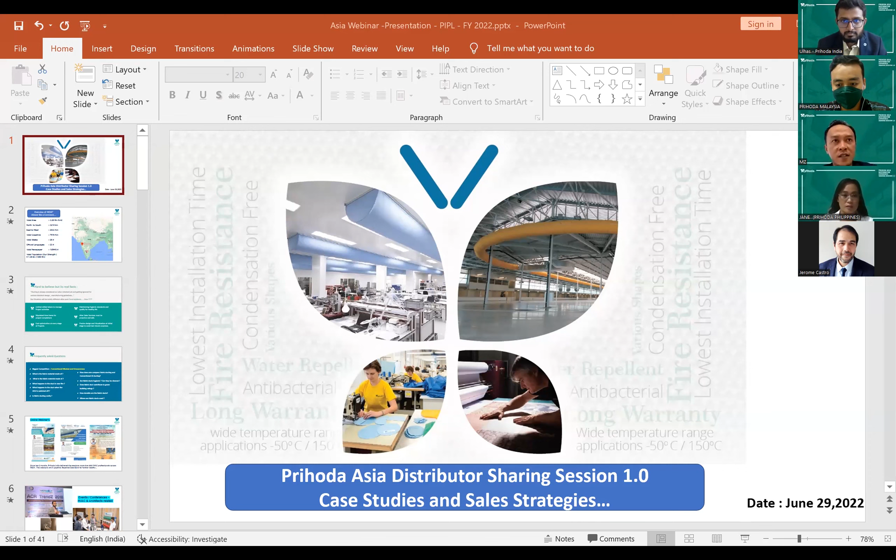Let me share my screen. I hope it is visible to everyone. Yeah, you can see clearly. And am I audible properly, so that I can modulate my voice accordingly? Yeah, your voice is okay, but you want to have a full screen. This one we just see a window. Oh, it is full screen only. I can see the file. Just hold on. Let me have a full screen one more time. Now, yeah, now it's okay. Very good, perfect. Great.

So without any waste of time, I'm just going to start the interactive session. During this interactive session, we'd like to present certain projects and our strategies during the COVID time.

Sorry to interrupt, Ulhas. You are showing us the presenter view. You should try to show us the actual presentation. Okay, click on the three dots below, next to the PowerPoint slide. Go down, go down. There are the three dots in a circle. Yeah. And then click there, hide presenter view.

Okay. That's brilliant. Okay, thank you very much, gentlemen. Thank you very much. But you, back to your screen. So, okay. Yeah, now it's better. That's better. Thank you very much. Thanks. It's a good learning now at the start of the interactive sessions.

Thank you, Jane. So today we are going to cover a few case studies of what we executed in India and a few of the strategies during the COVID time which helped us to maintain our business and customer relationships in this very tough time. If anybody has any questions, they can put them in the chat box or raise their hand, or at the end of the session we are going to have a question and answer session. So with your due permission, we are starting with our presentation.

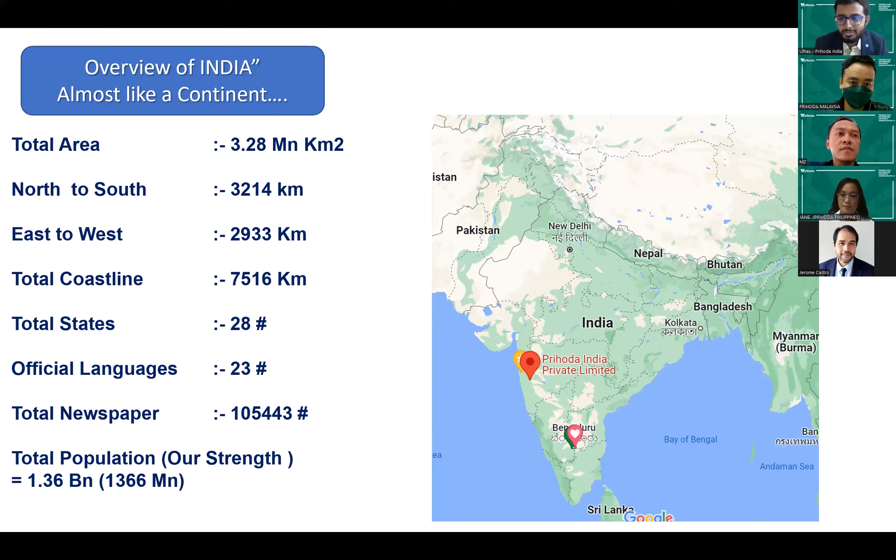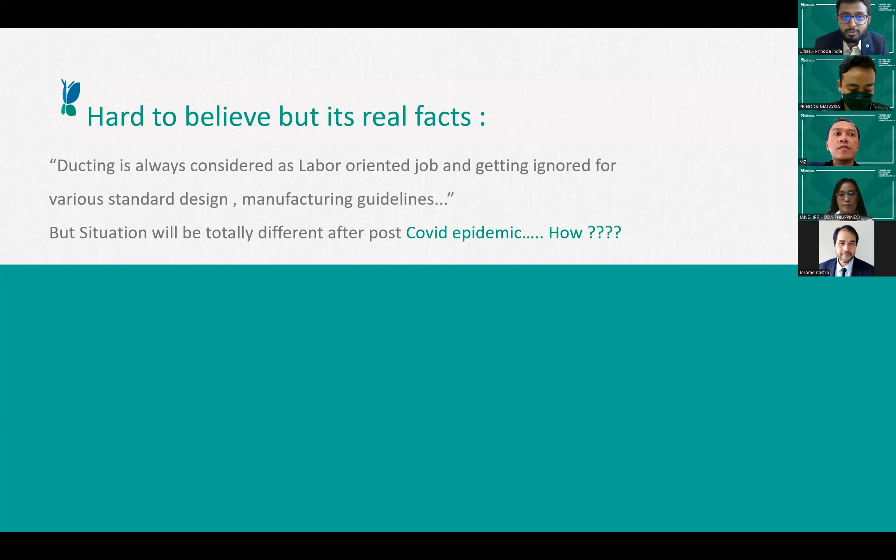And yes, it is very hard to believe, but it's a real fact that ducting is always considered a labor-oriented job. But post-COVID, things are going to change because we have to execute everything with limited skilled labor, maintaining hygienic standards in a stipulated time frame. After-sales services have to be very prompt, proactive and safe. Cost optimization at every stage is going to play a very important role.

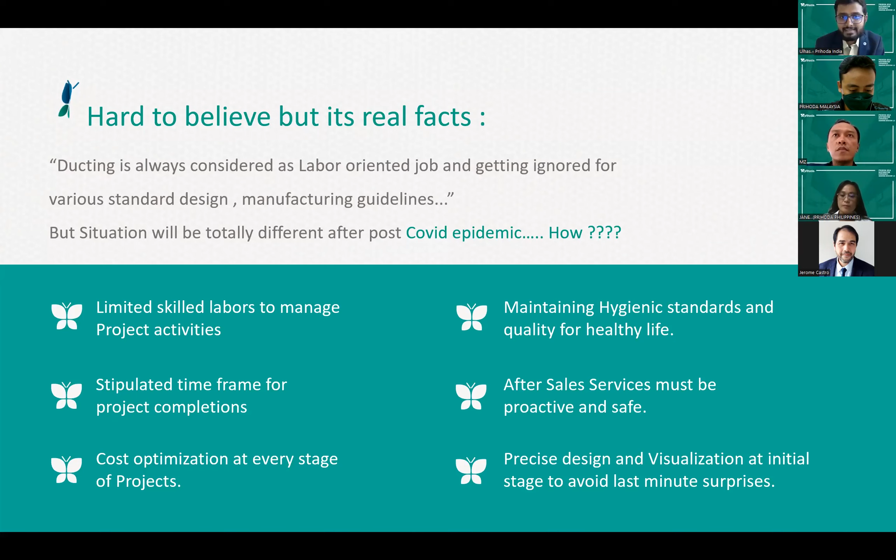So ducting is going to make a very huge impact in terms of cost optimization, in a very fast manner, with precise design and visualization before giving the order. And yes, it is possible in the Prihoda textile ducting business sector. So what are the most frequently asked questions everywhere? I believe it is the same in your countries too, in Malaysia and the Philippines.

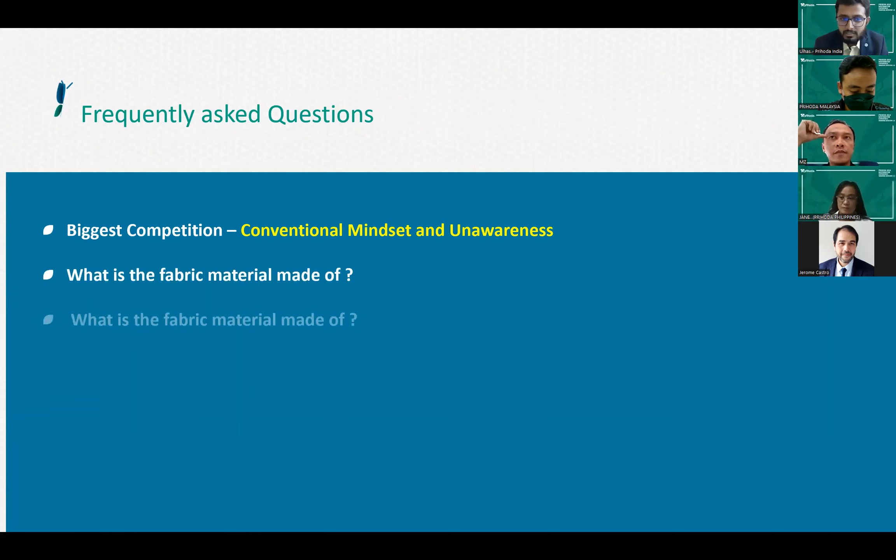Who are your biggest competitors? The first answer we normally give is the conventional mindset and unawareness. So our job is creating that awareness in the market with our various activities. All these questions, like what is the fabric material, what is it made of, what about fire, if the AHUs get switched off and there is no air what will happen, how does it compare with conventional ducting systems.

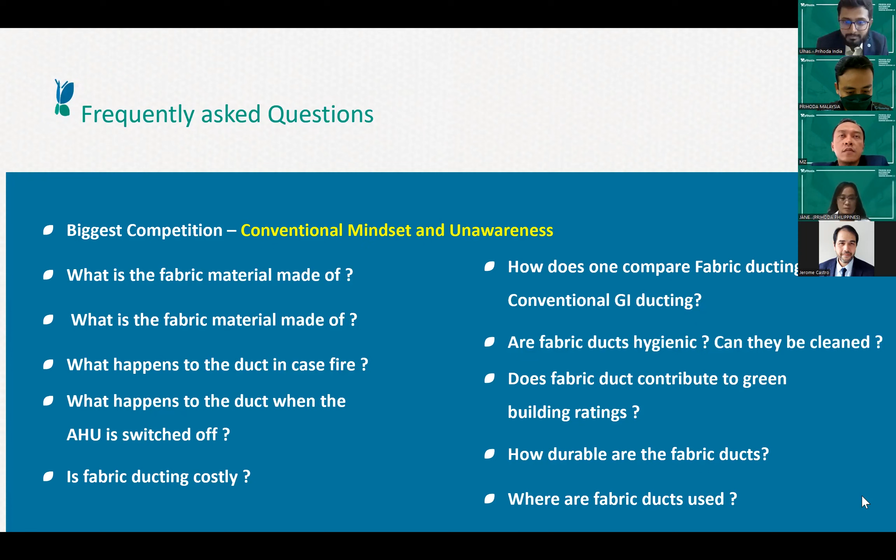Is it hygienic, antibacterial, antimicrobial? How does it contribute to green building? And of course, how is the durability? And which applications can we use fabric ducting for? If you see, from all angles, all our partners, distributors and companies have the answers to all these questions. And trust me, you will get a 100% response from our team for these kinds of answers.

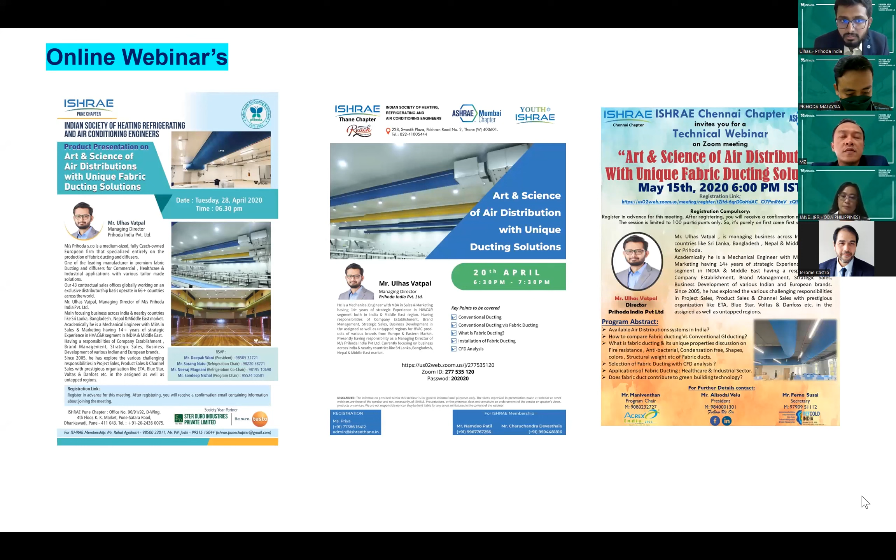During the COVID time, we did lots of online webinars on various platforms. In the last 2 months, we have approached more than 900 HVAC professionals in India, and various dignitaries from the HVAC fraternity attended these events. We also did certain programs during this lockdown, but with limited people, following all the standards. Plus, we are actively participating on social media during this lockdown to showcase our technology on various platforms.

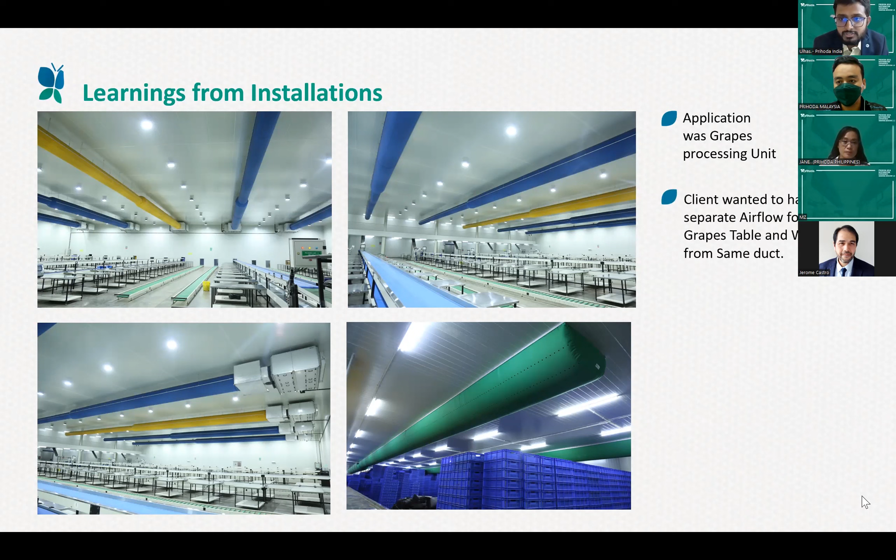The first project in India was in a packing house, which we started in 2019, and trust me, we installed this ducting 3 years ago and it is still running successfully. It is a grape processing unit with different levels of airflow for the tables and for the grapes. And the people who are doing the packing get a different airflow.

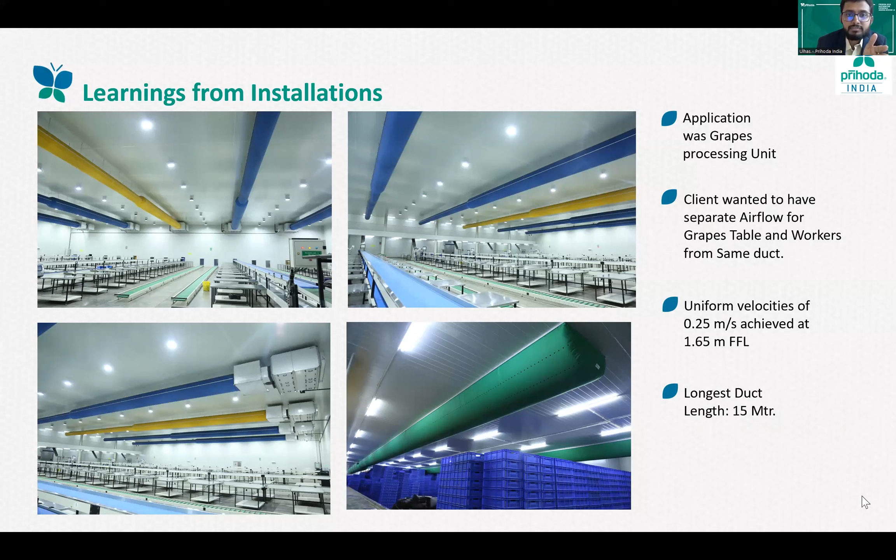You can see uniform air distribution throughout the area at a velocity of 0.25 meters per second at a finished floor level of 1.65 meter height. This is something very, very specific the client requested, and we achieved it with the longest duct length of 15 meters and a static pressure of just 90 Pascal.

So in terms of the energy saving, in terms of the designing of the AHU, we have added the value while designing this system with the static regain method.

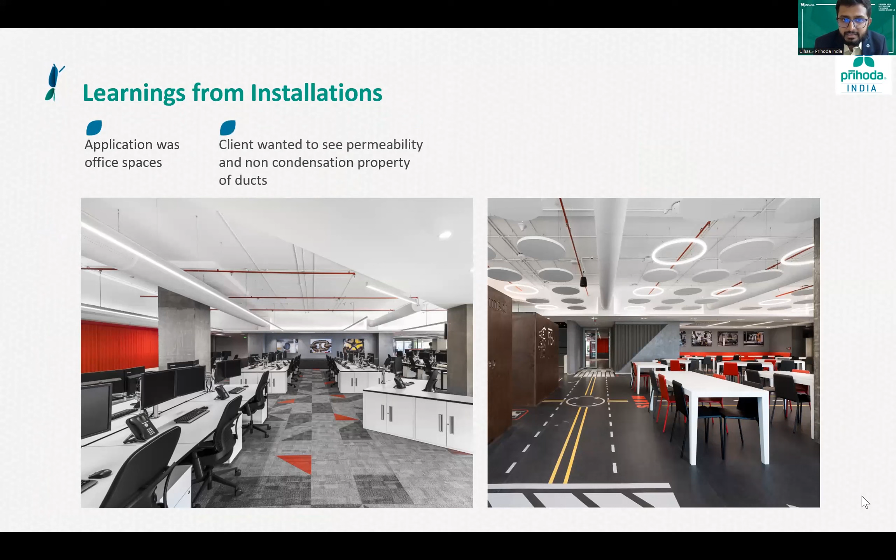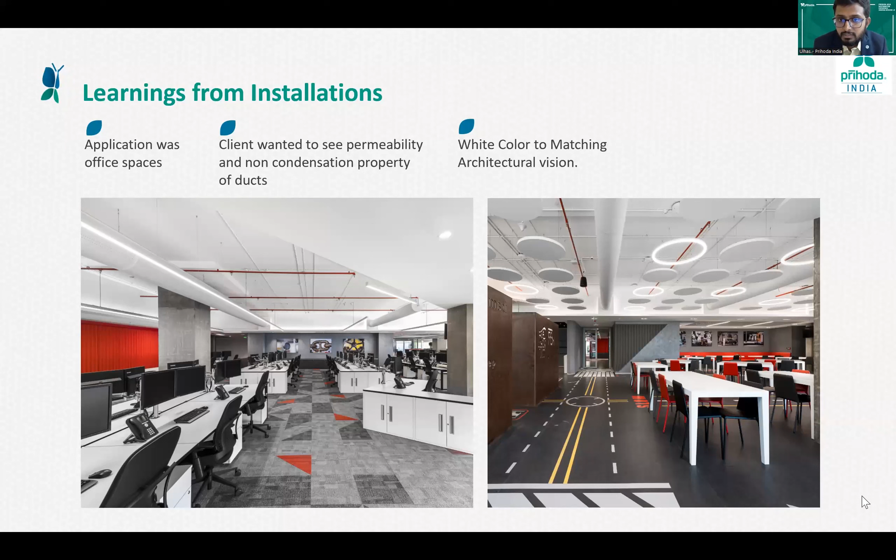Another project we have added is an office area, where the application is completely office space with more than 100 people sitting, and everybody wanted to have proper uniform air distribution throughout every corner with the limited capacity of the ducting, matching the aesthetic layout of that particular area. If you see the white, red, gray, and black, these are the only 4 colors used in the entire premises, with uniform distribution with Prihoda fabric ducting.

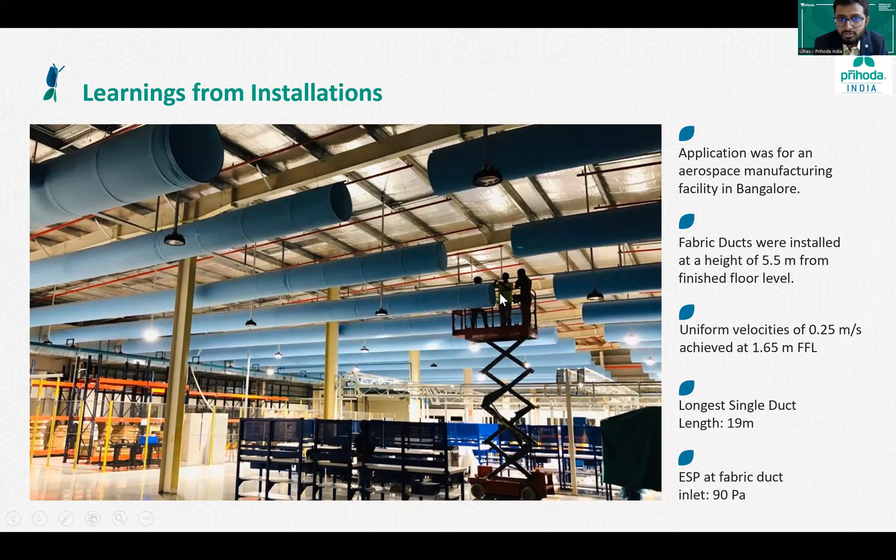This is another installation here. It is the aerospace center of Eaton, where the specific requirement was a height of 5.5 meters, and we had to give a velocity of 0.25 meter per second at 1.65 meters above finished floor level. Here the duct length was 19 meters, and again the static pressure is 90. And it is possible, and this project is still running very properly without any doubt. You can see the diameter of the duct when the people are going to install, and it is anti-static fabric.

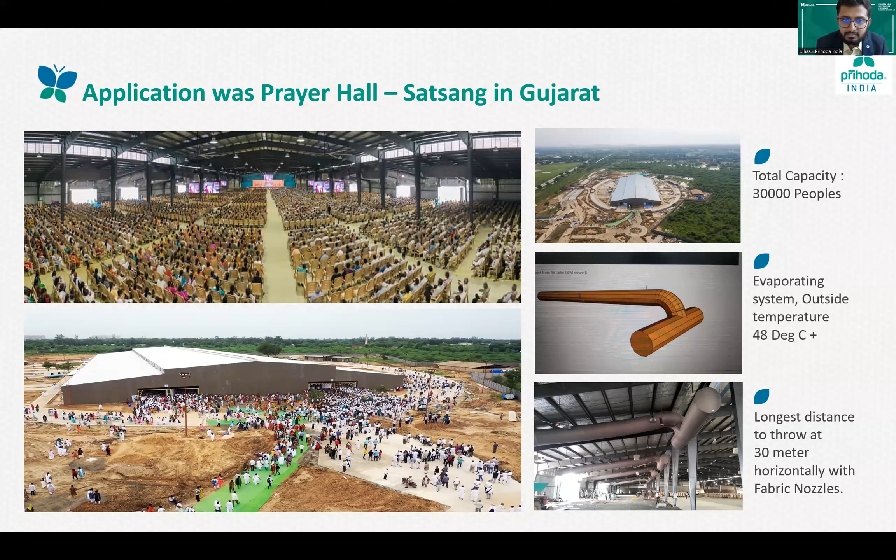Another project in India, you might be aware, is the big prayer hall, the satsang as we call it in Indian language, where 30,000 people are sitting under the roof, and the outside temperature was 48 degrees Celsius. With the help of evaporative cooling systems, only 16 ducts of this kind, having 228 nozzles on one duct, solved the entire cooling need of that premises. This is very important to know on this forum: from the smallest to the biggest space cooling, everything can be addressed with textile ducting with our expert team.

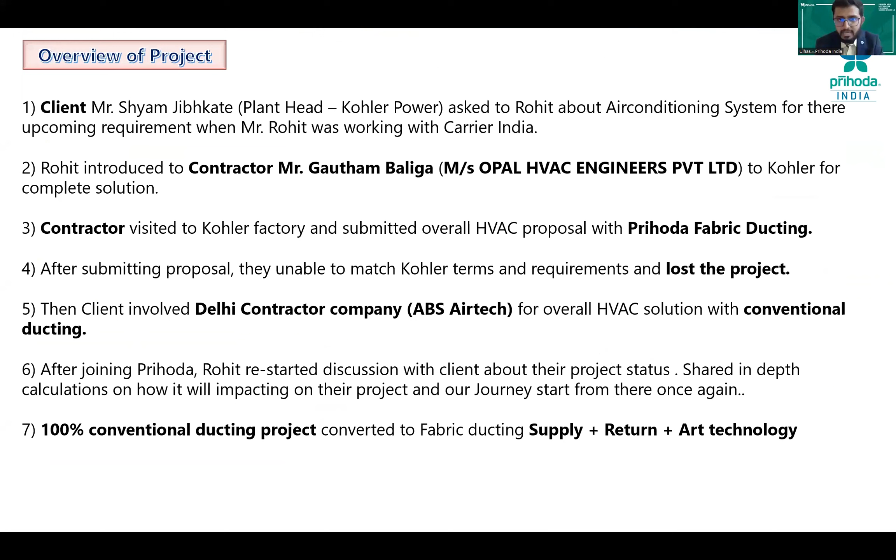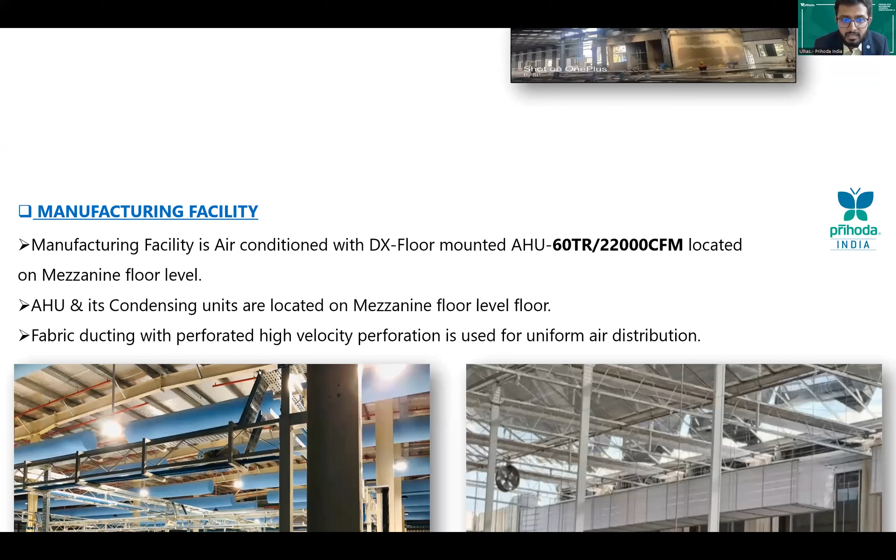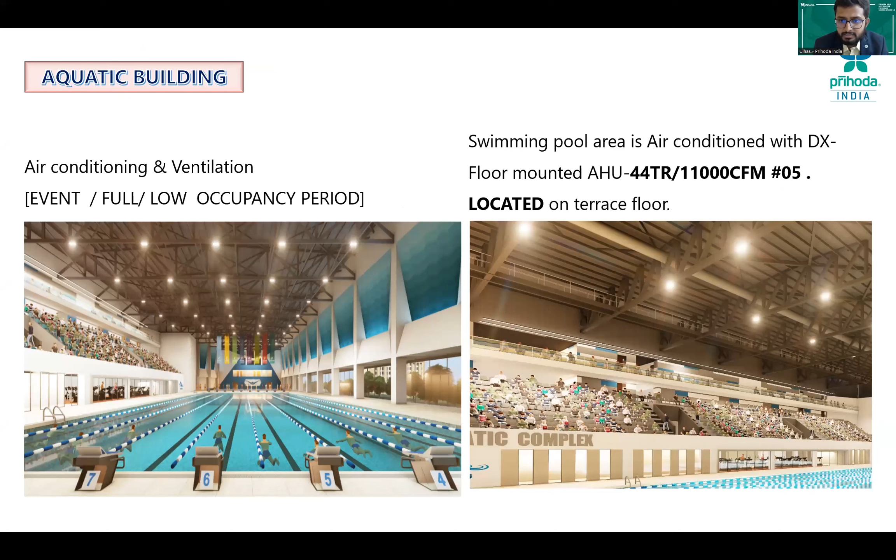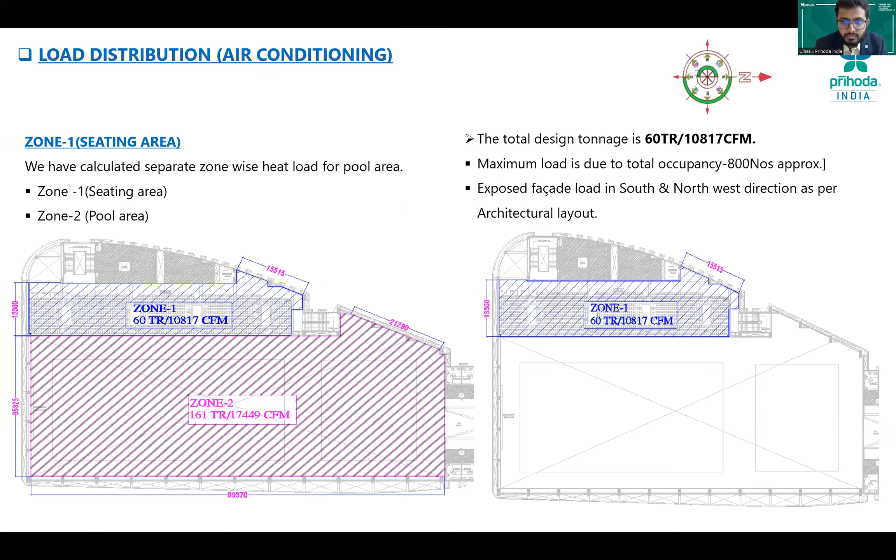Another project is one of the biggest sports complexes in India, which is now having the air from Prihoda fabric ducting. Hopefully by the end of this year, this facility will be ready. This is one of the biggest sports complexes in India. It comprises swimming pools, badminton courts, basketball, all these areas, divided into zone 1 and zone 2. Such a big area with minimal ducting, with horizontal airflow, we are able to achieve uniform air distribution in all areas. This is a glimpse of the projects we executed in India.

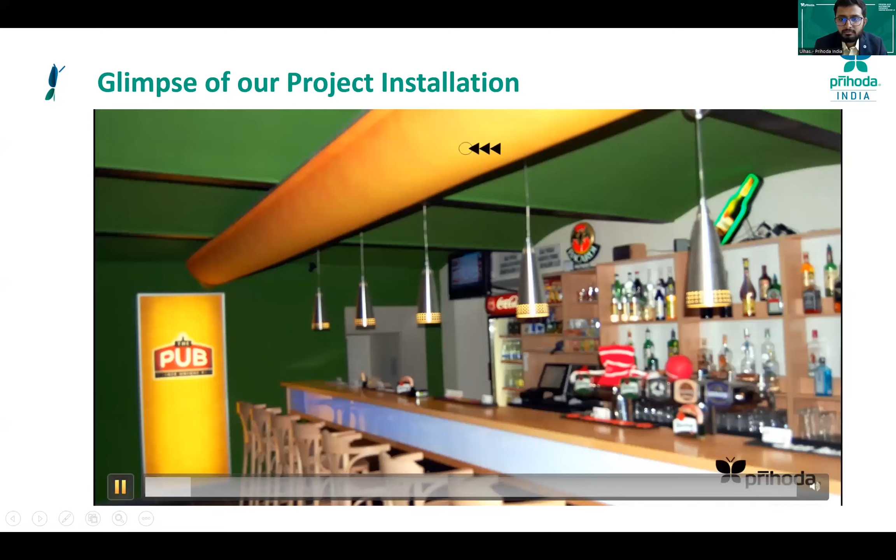I hope it is very much visible and the audio is there.

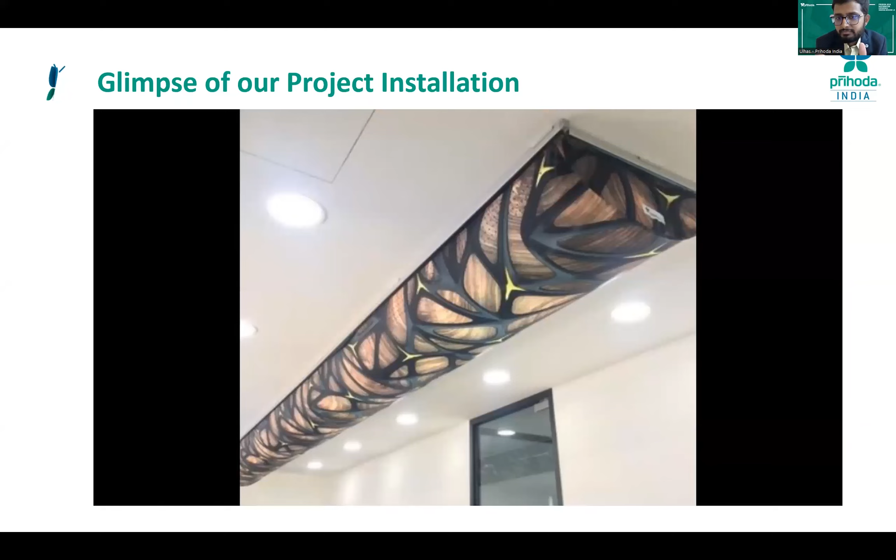So these are a few glimpses of the making between Prihoda Malaysia, Philippines, Prihoda India, Europe. What can be possible? This is all a mixture of the projects between all these 3-4 countries together.

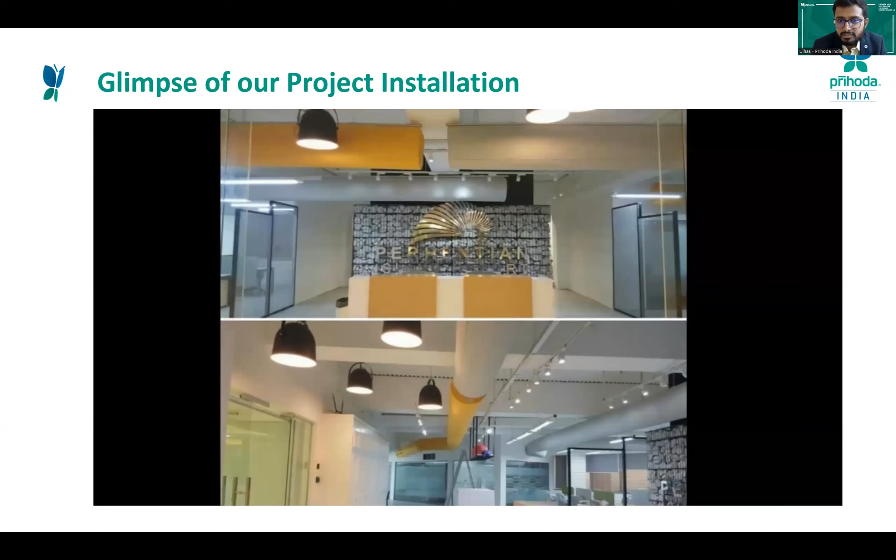And thanks to Prihoda Malaysia and Prihoda Philippines, with the help of their projects, we are now getting good responses in India because the references are very strong. And a similar kind of ducting we are going to install in 3 big companies, including Prihoda India's manufacturing unit.

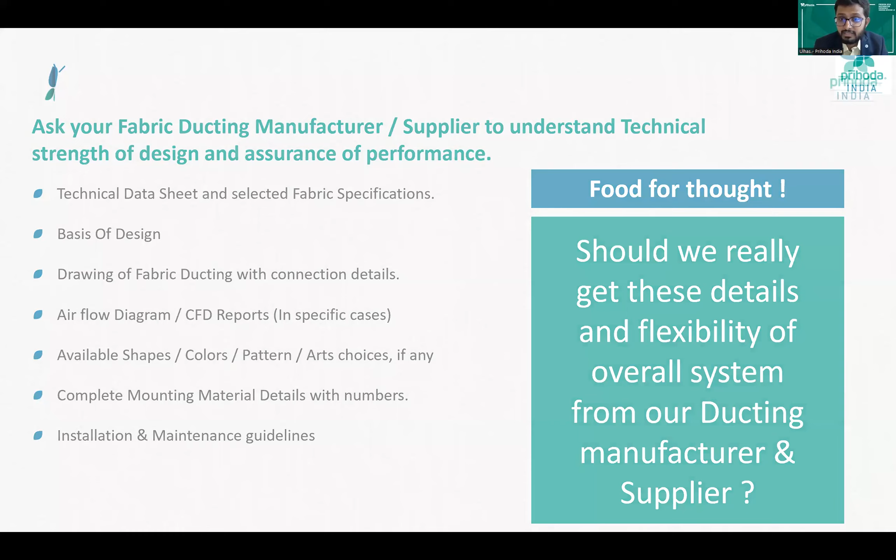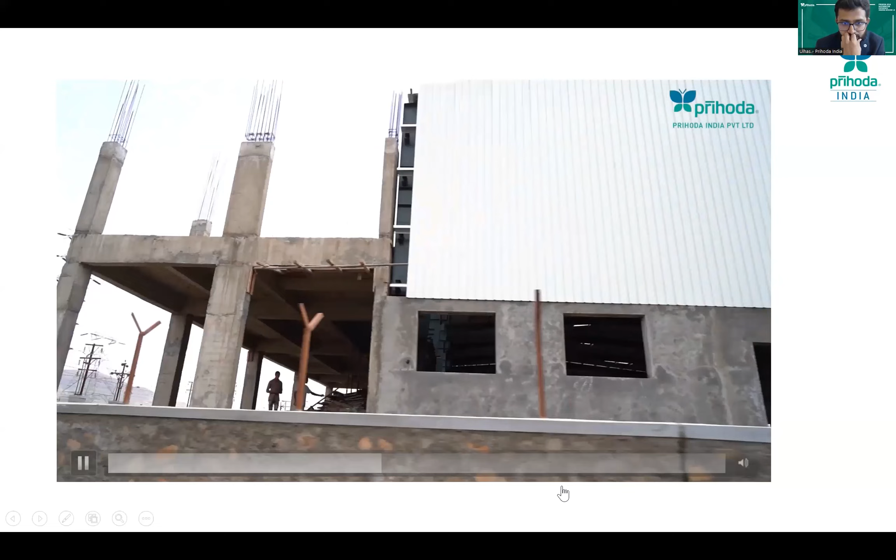I'm just taking it. So basically, we are together. I'm just keeping it a little ahead.

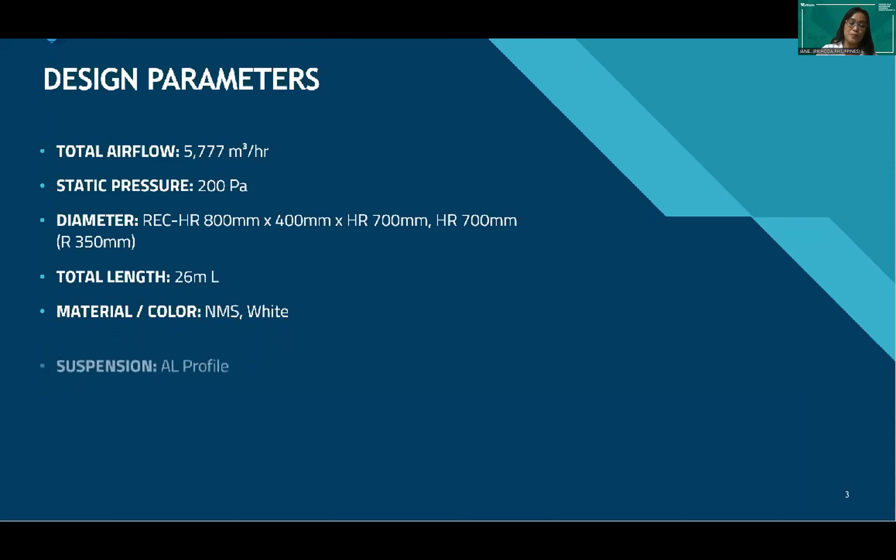They prefer the color white to blend with the interior, and the material is NMS, a non-permeable medium weight standard material with a 10 year warranty. The installation is with aluminum profiles.

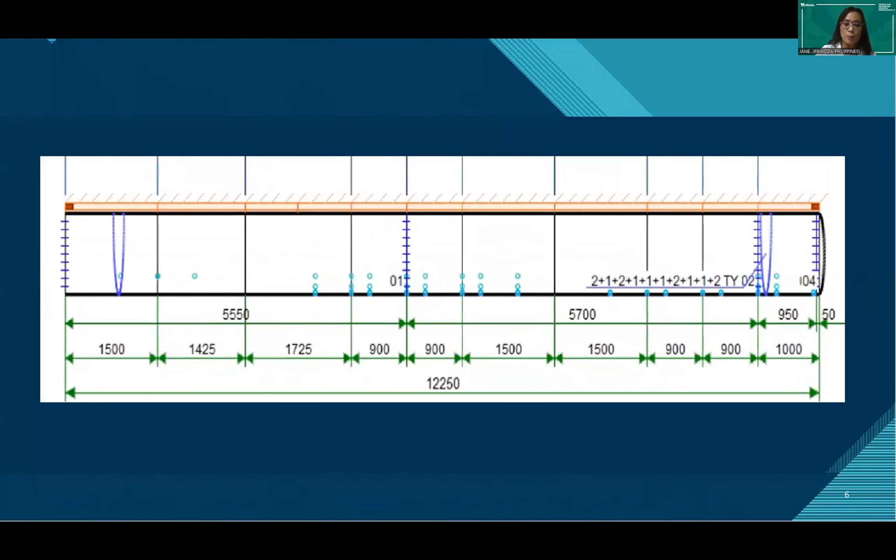By plotting the given parameters into the Air Tailor software, by the way Prihoda has a software we call Air Tailor, used for designing and simulating fabric ductings, Prihoda fabric ductings in particular, we are able to identify the position of the nozzles, how long the blank spaces are before the nozzles, and the proper location of the tires to always keep the duct in shape.

By using the Prihoda software and with the help of Prihoda technical support, we were able to identify the correct angle for the correct air throw. We can see that there are several angles just to attain the flow of air for the particular location. The airflow was divided equally per row of nozzles just to attain a given range of velocity. To reach the required distances, different angles were obtained, such as 219 degrees, 199 degrees, and 173 degrees.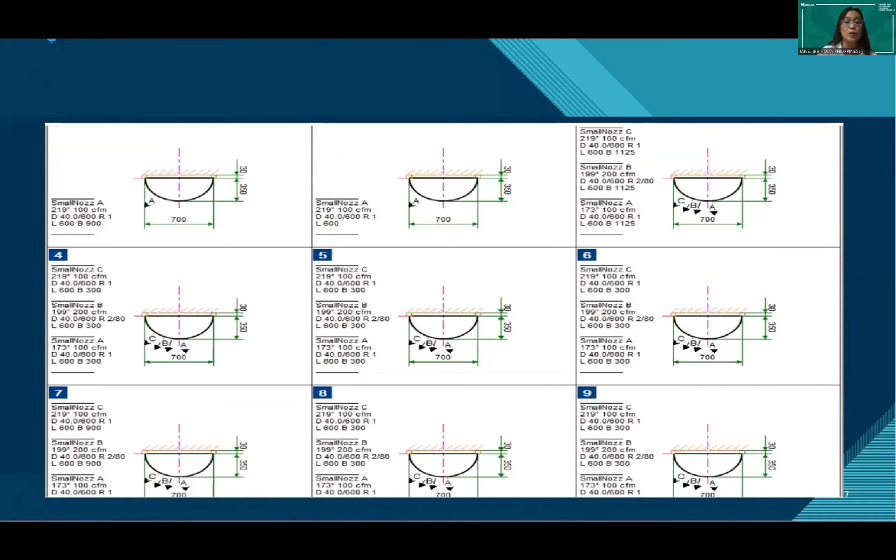Using the Prihoda software for maximum velocity, we were able to plot the maximum velocity at the point of axis, which is 14.6 meters per second for all nozzles, with a required height of 4.2 meters from the duct to the ground. For the air to reach the guest, the velocity is around 2.43 meters per second, just enough to make the guests feel comfortable without destroying their hair and smudging their makeup.

The second part of my presentation, an interesting project, is the Axilum Resources Corporation. This is the industrial part of the presentation. Axilum Resources Corporation is an export-oriented manufacturer of premium coconut products. It is located in Medina, Misamis Oriental, far down south from our office.

The client is an exporter to Europe, and they know Prihoda in Europe. They emailed Lucas from Prihoda Sales, and Lucas sent an email to us regarding their inquiry. We usually visit clients anywhere in our territory, but with lockdowns and protocols during the height of the pandemic, we were not able to visit them. So we were able to finalize the project only through Zoom meetings and emails.

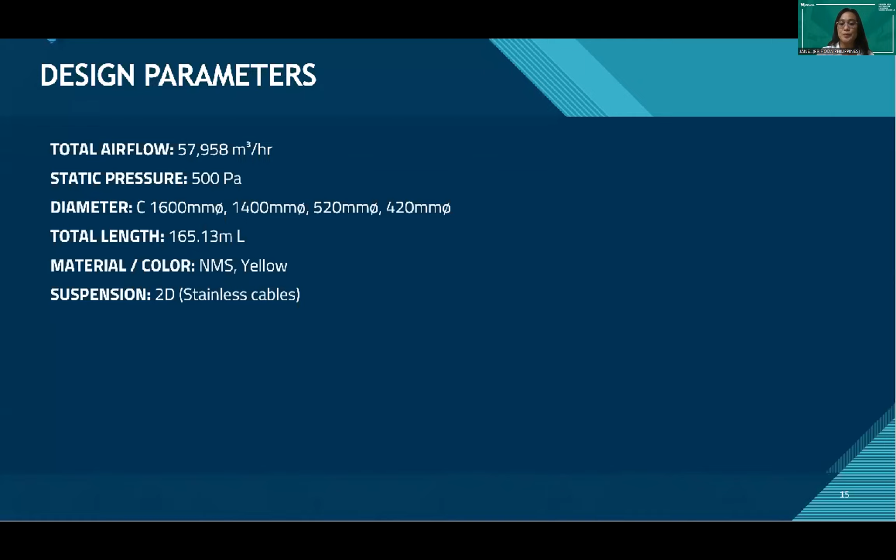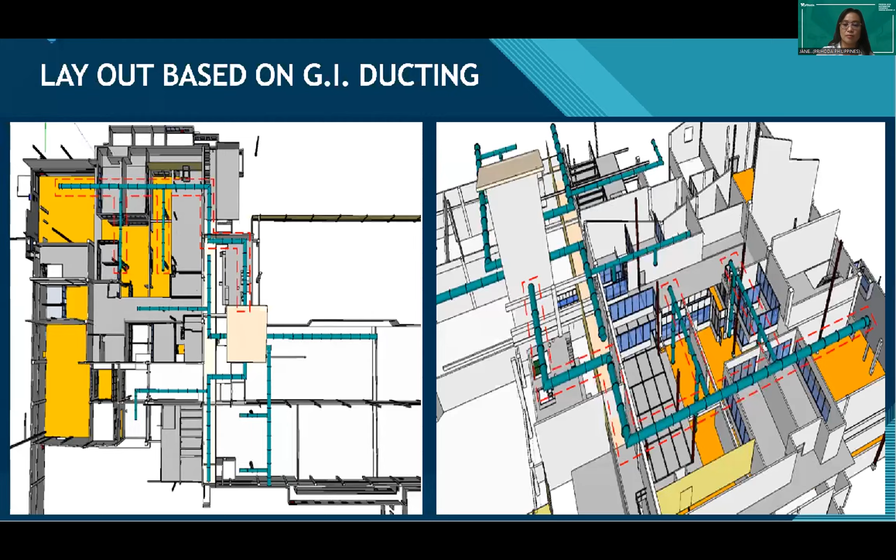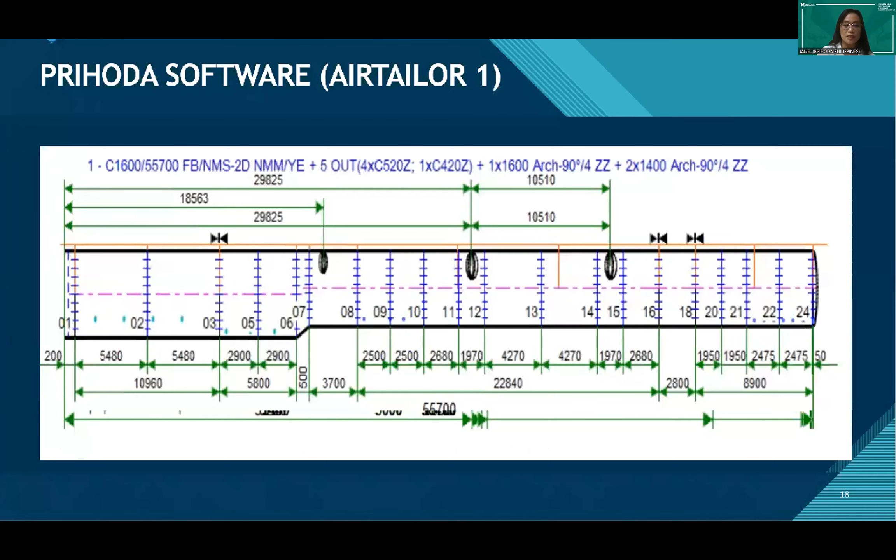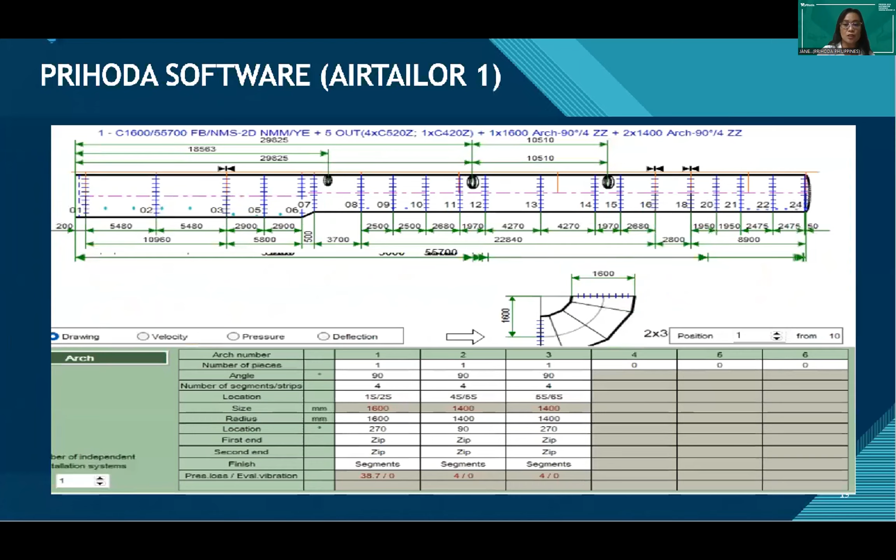These fabric nozzles aim to ventilate the hotter parts of the area with ambient air. Using AirTailor 1, we input the requirements and the location of the outlets and nozzles, including 3 elbows, and identified whether pressure losses were still tolerable. We also balanced the outgoing air by filling in the required capacity for each part. Using AirTailor, we can already eliminate third-party testing and balancing, which becomes an economic saving.

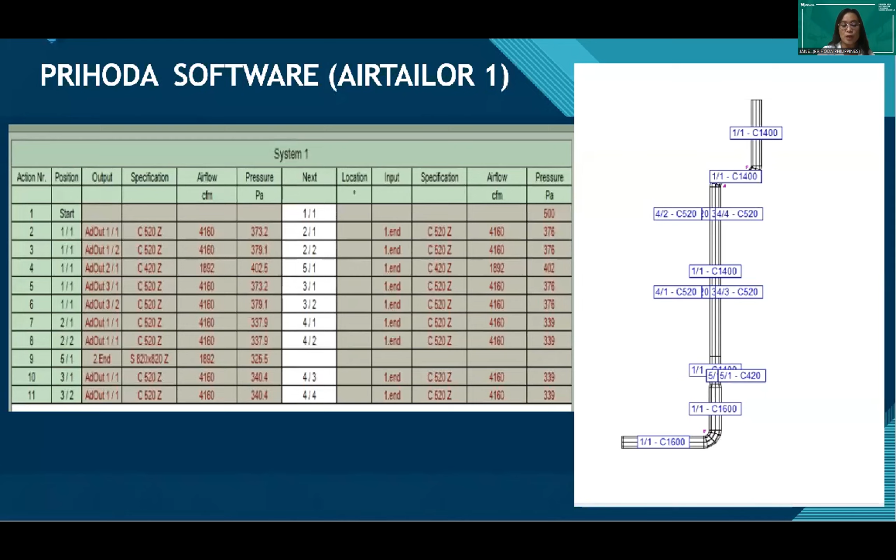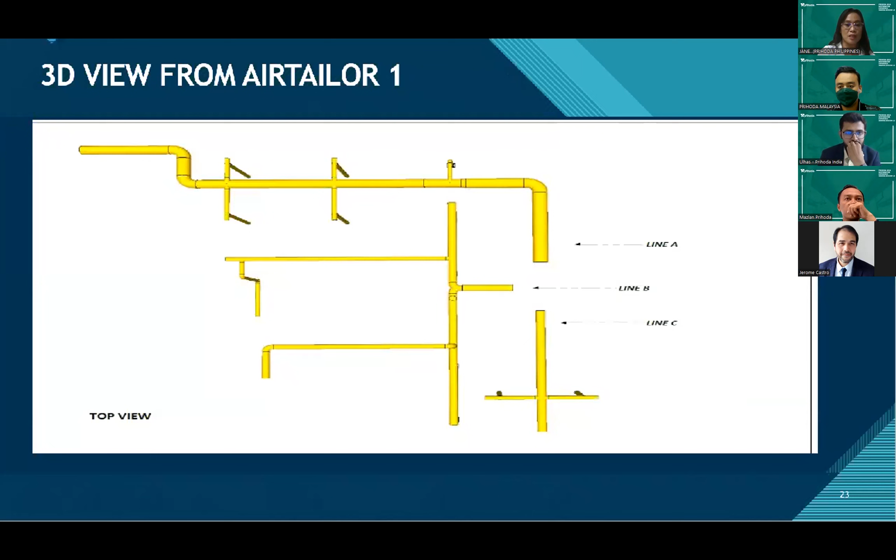Using AirTailor 1, we connected 11 parts of the ducts with different airflow, velocity, and static pressure requirements, and simulated the velocity coming out from both big and small nozzles. We also plotted the fabric duct layout according to the client's requirement, so that Prihoda factory was able to manufacture the fabric duct according to our design.

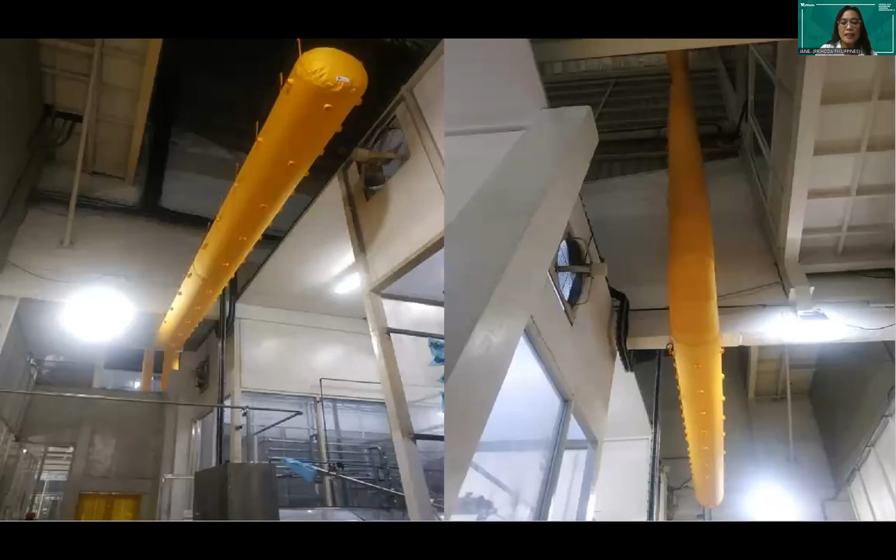These are some of the actual pictures of line A. The installation is very interesting and complicated, and because of these complications, the clients found some issues when they tried to connect it to the fabric duct.

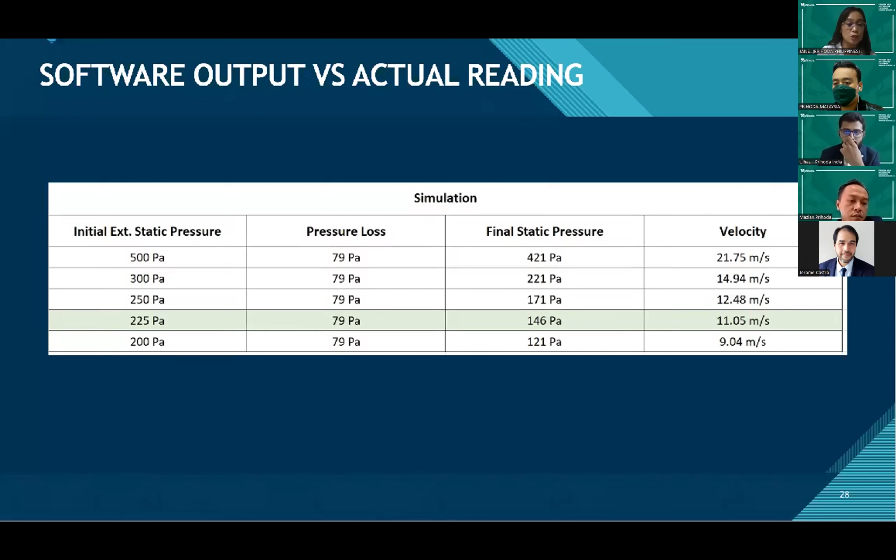As part of our after-sales services, we supervise the installation and validate actual readings versus software output. The software output, confirmed at 21.75 meters per second at 500 pascals static pressure, differed from the actual reading of only 11.05 meters per second. This table shows that even as velocity increases, pressure losses remain constant at 79 pascals. Since we only have velocity as the basis, we interpolated the data to obtain the actual static pressure of their blower, which is 225 pascals.

During validation, most of our readings conform with the output of our AirTailor 1; only a few clients with special conditions are excluded. We reviewed common practices, and one is that in good manufacturing practice, filters are commonly installed. Axilung is basically a food manufacturer, and placing filters in their ventilating system is required for good manufacturing practice. But filters reduce the static pressure of the system, and the required filtration dictates the reduction in static pressure.

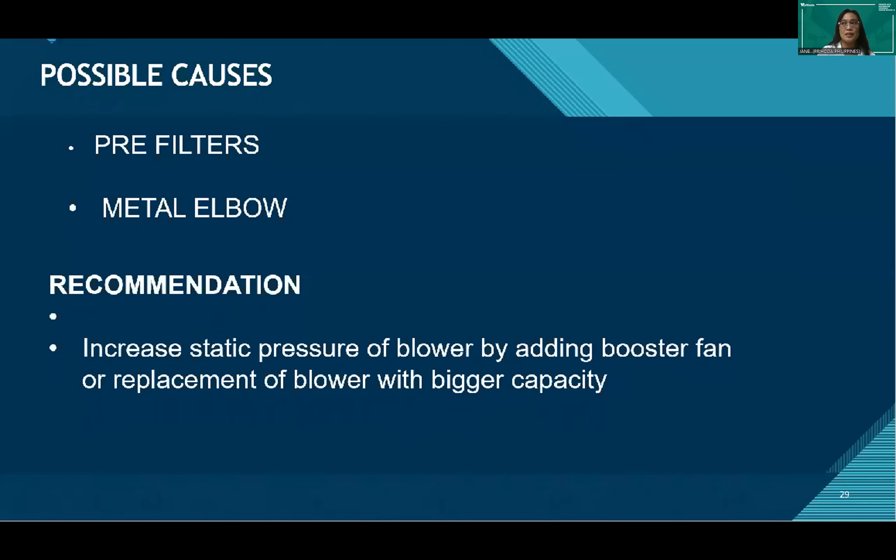Also, upon checking, the connection from the blower to the fabric duct is a 90 degree metal elbow. Therefore, from the initial static pressure of 500 pascals, 275 pascals was already lost due to the EU4 filters and the 90 degree metal elbow. We were asked to make recommendations regarding the pressure loss, and we recommended using a booster fan or replacing the blower with a bigger capacity if they wish to maintain the initial static pressure of 500 pascals.

So these are some parts of our interesting project. We, as Prihoda Philippines, have already completed more than 100 projects, and each has an interesting story to tell.

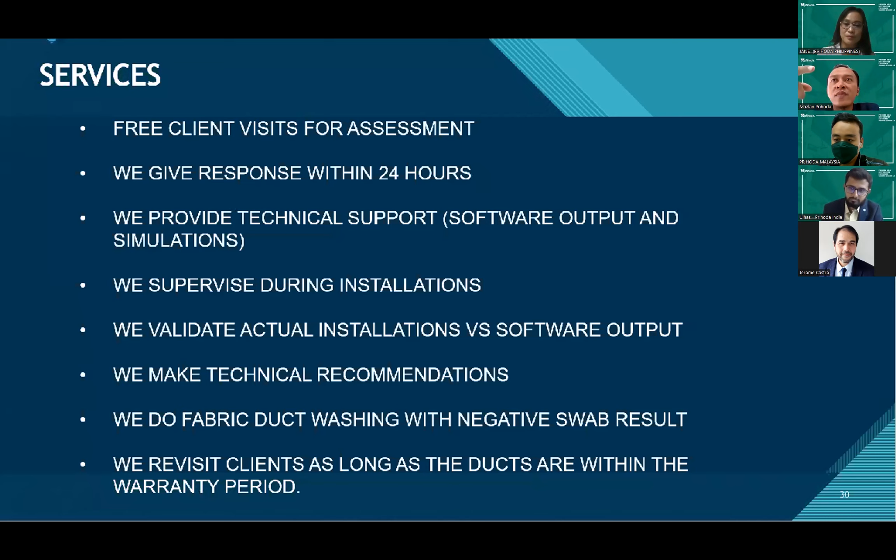So the straight vertical down, are you using permeable or non-permeable? Non-permeable. We cannot use permeable for 165 meters of fabric because we will lose 30% of that fabric with permeable. So how about the condensation issue? This is only blower, fresh air, no conditioning system, so we don't have that problem.

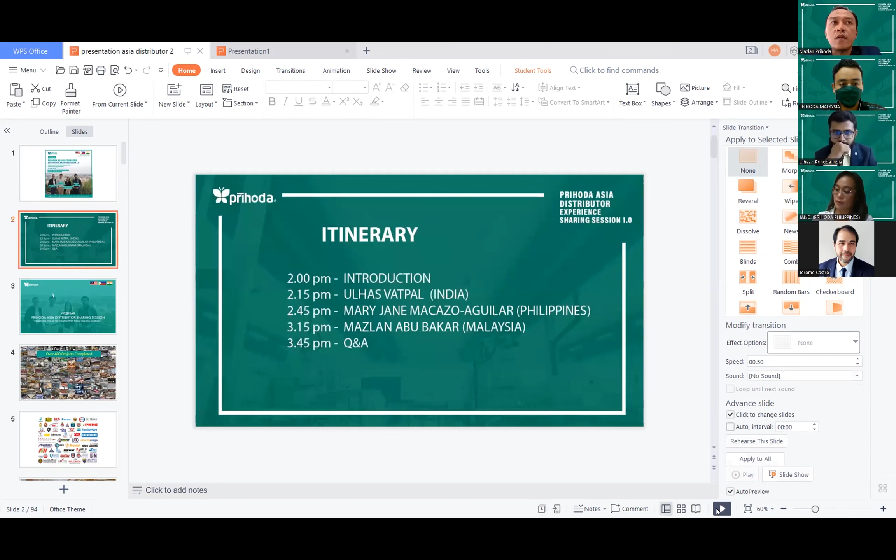So, Zahin, is my slide okay? Everything okay? Yes, welcome, you can see. So, welcome, right? So Zahin, you can see 400 projects? Yeah, over 400 projects completed. Thank you.

Okay, so I will share some of the interesting projects in Malaysia. We have been distributing Prihoda products since 2013 until now, so quite many years. We have over 400 projects completed. There are so many projects already in Malaysia, because there is a question from the audience looking for reference projects. We have 400 projects in Malaysia, slightly more than the Philippines, Jane. Big project or small project, we still consider it as one project.

So these are our clients for some of these 400 projects. We have JKR, Petronas, Post, Daikin, many of them. So the first project I'm going to share today is LLM Bangi, a government department, Lembaga Lebuh Raya Malaysia. It's a highway department. There is a hall. The interesting part of this project we're going to share is the blend of the design.

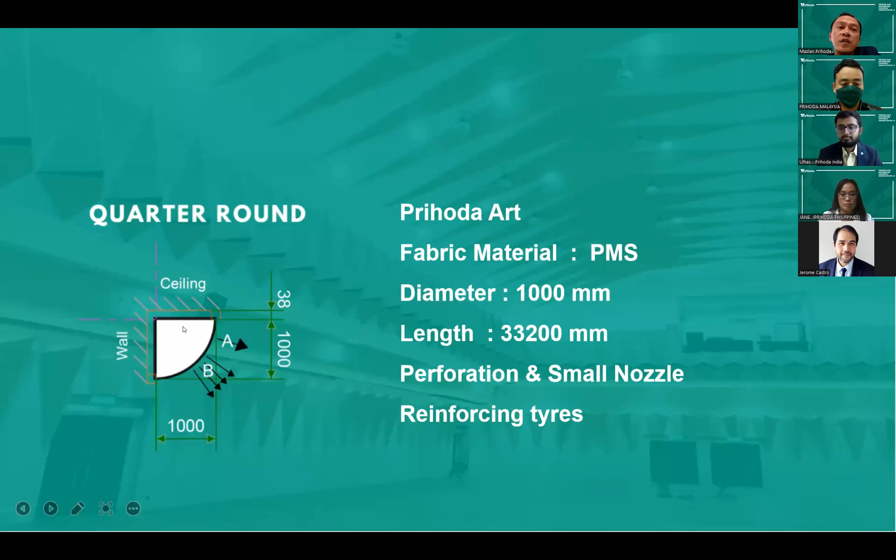The fabric material we are using is PMS, permeable, because like I discussed with Ulhas, in Malaysia we have very high humidity. We cannot use non-permeable material because the condensation issue is very serious in Malaysia, as we are a hot and humid country. Our RH is nearly 80, 90%, sometimes 90% during the rainy time. So we need to use PMS. The diameter of this one is about 1000 mm, length 33,000. The interesting part of this project is the blend with the interior design.

All right, so this is the photo. I will not take too long sharing today because I am just replacing Mr. Lee. So this is the actual usage of this hall. Everybody cannot realize where the ducting is. The ducting is part of the design.

Okay, the second project. I will share a lot of projects today, mostly on Prihoda Arts. This is one of the just completed projects, I think this year's project. This is the fabric. If people have never seen fabric before, they will not recognize where the ducting is. So basically, this is the ducting. I'm not sure you can see my mouse moving. If you can, very good. We run it on the ceiling, and at the same time we run it vertically on the wall. This one can also serve people.

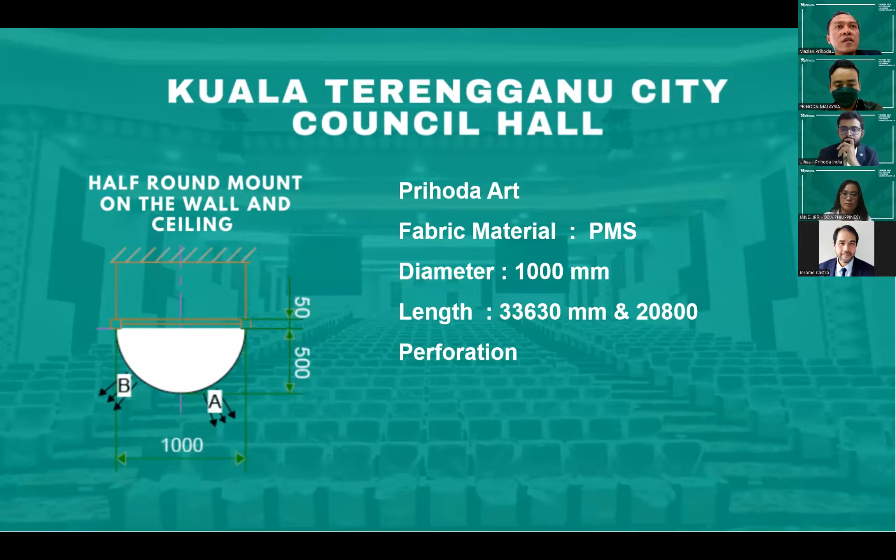So this project utilizes, like in Malaysia, an art we call batik. In Malaysia, people normally apply this type of pattern to fabrics. Yeah. Okay. So 1000. This project is at Kuala Terengganu, Malaysia. Kuala Terengganu is part of Malaysia. Okay, this is the project.

Okay. And then the next project is the Miri Mosque in Sarawak, Borneo. From the 400 projects, this project for us is quite nice, quite manageable, quite beautiful, also the arrangement, because they are painting the Prihoda arts on the fabric matching with the ceiling pattern. So this one is also a very nice project. This also utilizes Prihoda arts.

All right. So this is a half round shape. The interior designer gave us a way to run it half round, to make it nice. Without this, it would not look as good as this. All right. So this is one of the most interesting projects we can share today.

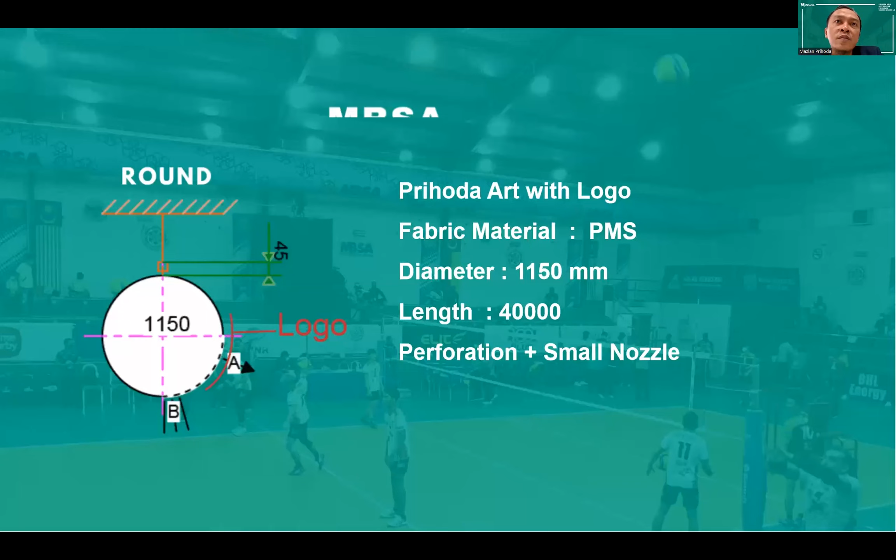Next project is the MBSA hall in Shah Alam, Malaysia. Before this, they were using metal ducting. For your info, around 70% or more of our projects come from halls. Yeah, so many halls we are installing in Malaysia. Okay, very simple. Before this, they were installing metal ducting. They had many problems with the cooling, short circuits, right? And then they cut off the metal ducting, then installed the printed fabric.

And then one of the projects I also want to share today is about energy. That one was about the arts; this one is about energy. This project is at KH Tower, Jalan Sultan Ismail, Kuala Lumpur. Before this, the client was using metal ducting with an old air conditioning system. They replaced it with a new air conditioning system with fabric ducts.

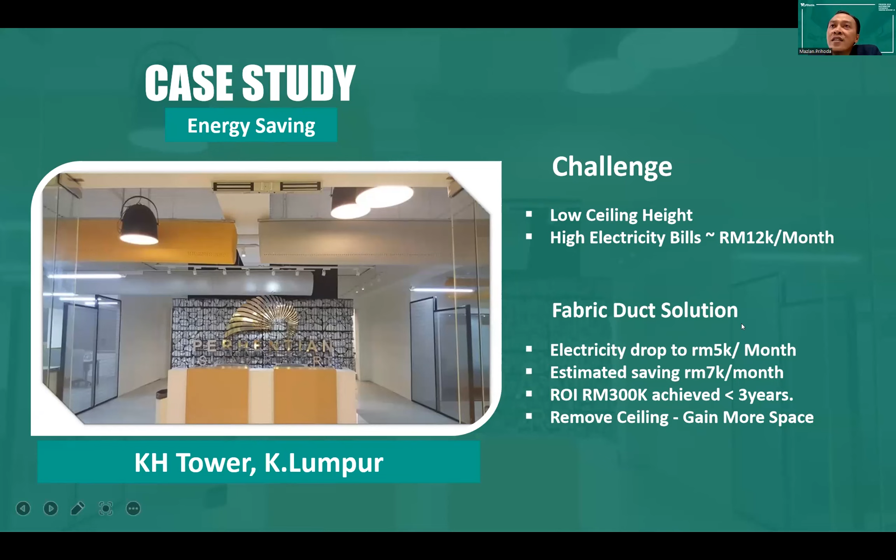Okay, sorry, this is in the Malaysian language. So I just want to pick the CEO statement: they are saving about 60% on the billing. So this is from a Malaysian television channel, one of the popular ones in Malaysia. They interviewed us on this project. In this project, the client is saving 7,000 a month. All right.

So this is the photo. There is a main duct in the main office, and then there is a cross on the wall, so we can supply to the rooms. Yeah, we make it like this. Okay.

Okay. So this is another project, a bowling alley. The client requested to install 100 ton cooling, but our engineer proposed just 50 ton cooling, just enough. Because of very good air distribution, they get a temperature of 17 evenly. So there is no need for a big horsepower, oversized aircon when we are using fabrics.

Because in Malaysia, it's quite hard to use metal ducting to distribute the air evenly. By using fabric, we can use less cooling capacity. Yeah.

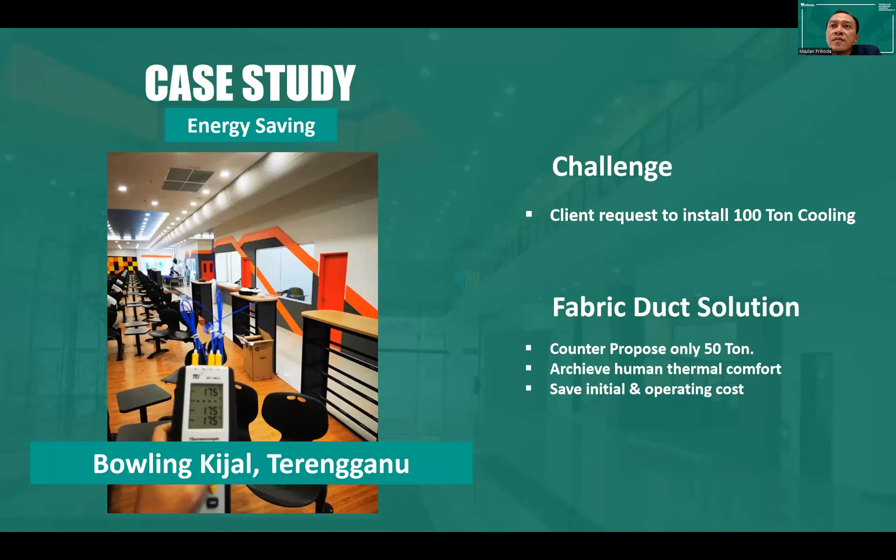So this is also an interesting project we want to share. It's a Daikin factory in Malaysia, in Sungai Buloh. They are using spot cooling for their factory. Okay.

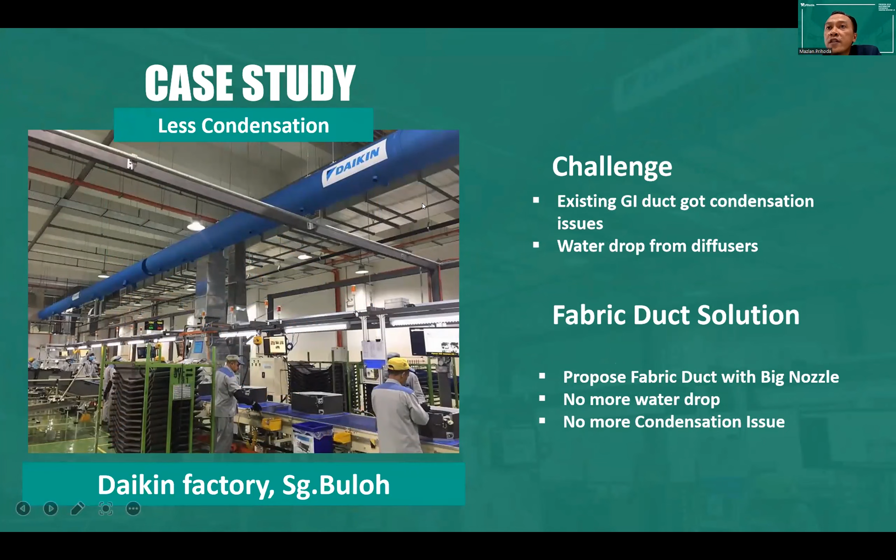Okay. This one, we also helped the client save 51 ton. Before, they were using 120 ton cooling, plus the client wanted to add an extra 25 ton because they felt it was not cool enough. So our engineer proposed they use only 100 ton. So the client saved about 51 ton. Roughly, on one particular hall, the client saved about 300,000. We helped the client save 51 ton because of an air distribution issue.

Because sometimes people do not know what the problem with their aircon system is. Basically, it's mostly an air side problem, so you need to look inside. Before this, they were using metal ducting with linear diffusers, and it was quite hard for the air to move around. Yeah.

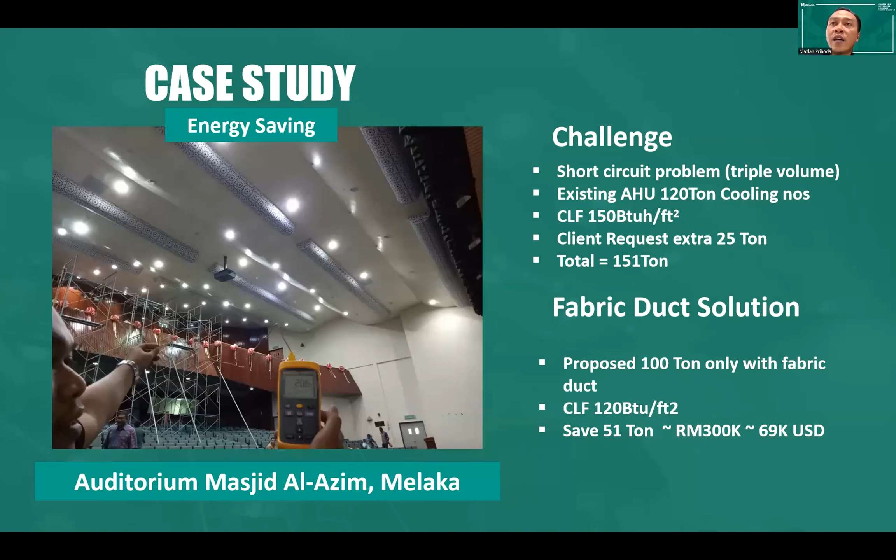This one we also installed at an open space, so there is no wall. This is for a mosque. We installed it where there is no wall because the owner of the mosque wanted to put aircon at the open area. It will cool down, because there is no wall. This is to cool down the open space. So the problem is the condensation issue. So they are using a double coil, double cooling coil.

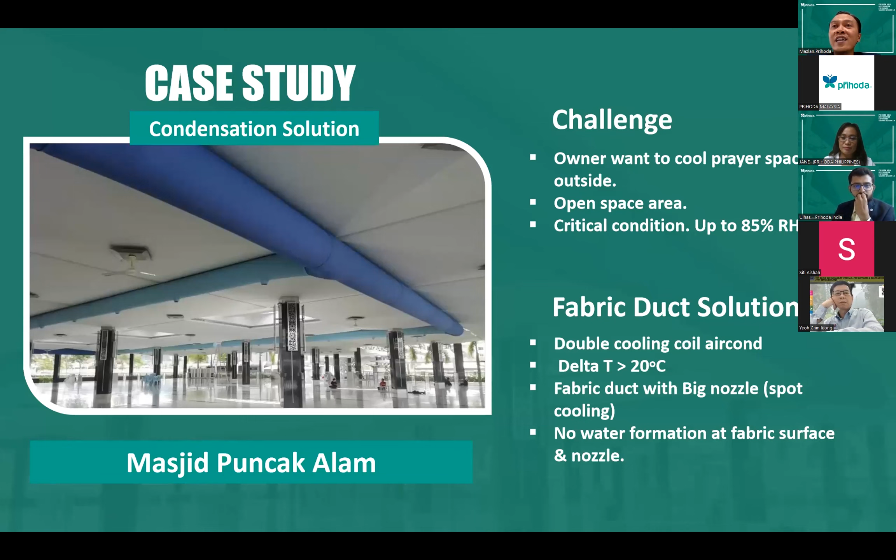So if 33 minus 20, we have an off coil of around 13 degrees C, which is way below the dew point. So if the GI duct does not have enough insulation, it will condense very badly. But with fabric, there is no condensation. So this is the proof that fabric has less problem with condensation when installed at very high critical relative humidity.

Okay, this is also one project. Before this, they were using spiral duct. The problem was condensation at the jet diffuser dropping onto the students' exam papers. This is a university hall they use for exams or events. So they cut out all the spiral duct and changed it to fabric, no more condensation.

Even though there is infiltration at the roof going inside, the dew point will increase. When the dew point increases and supply air is below the dew point, there is a high possibility of condensation. But with fabric, even though supply air is below the dew point, there is no water drop. But the previous one is more critical, because the RH and dew point are very high compared to this.

But this one also had a problem with the GI ducting, metal ducting. Actually they did not have a problem at the ducting. Their problem was the jet diffuser, because the diffuser has no insulation.

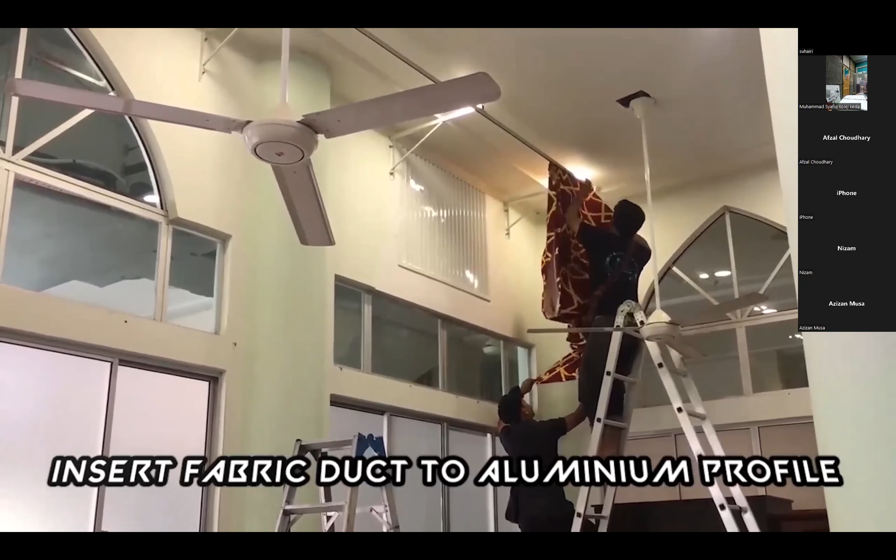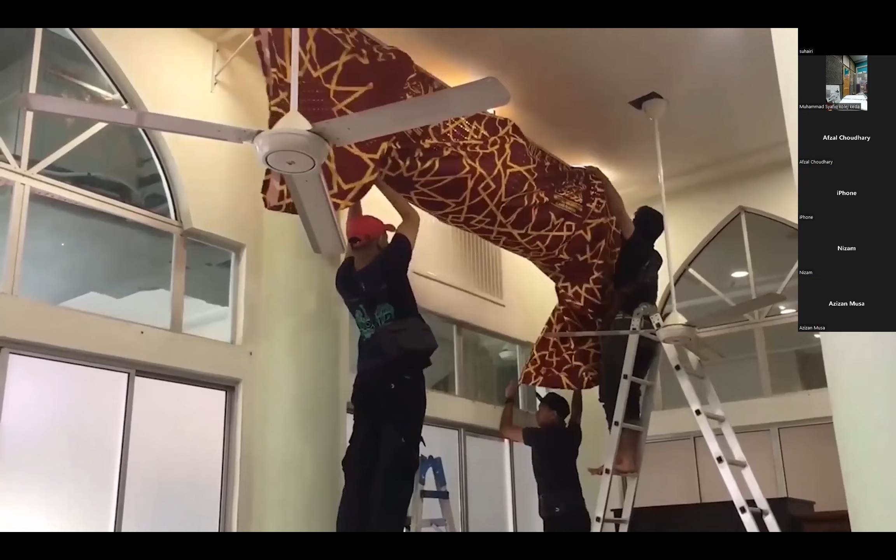Okay. So the guys want to ask about the installation, so I'll show a bit of the installation video. This is a project we installed after maintenance. The railing is already installed. So very easy to install. Anyone can install it. This is an adapter connecting the fan coil to the fabric. It's a rectangular shape.

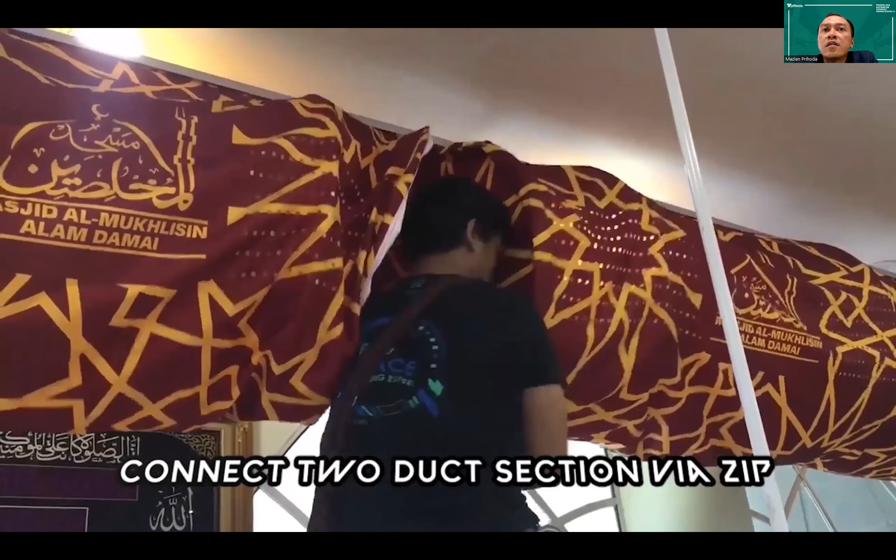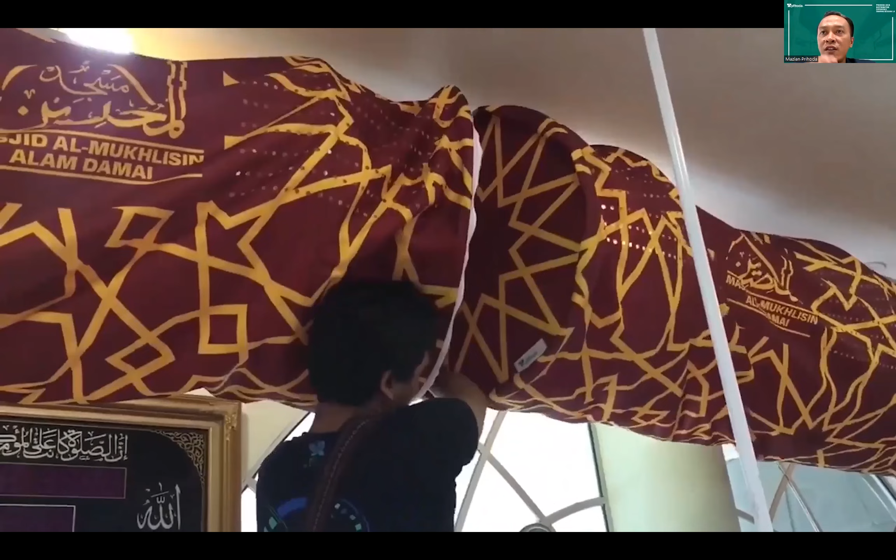So the connection is only a zip, very simple, and then we have a fabric overlap. One duct using two fan coils, separate fan coils in one duct. There is a separator in the middle, but we can see it's only one line. So very fast. Compared to metal ducting, which may take 1 week to install, fabric is very easy, less than 2 hours maybe. You can print anything you want on it.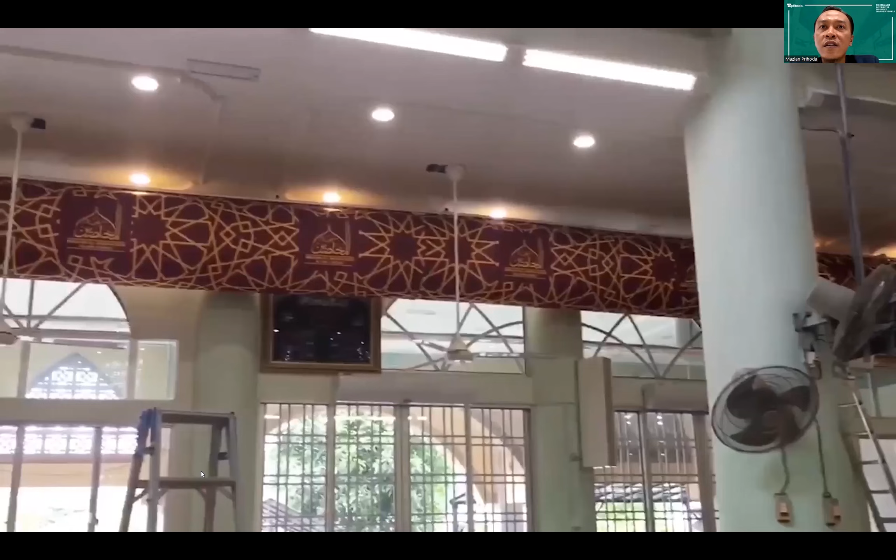Oh, the video has a problem. Why? Suddenly the video stopped. Just finished. Okay, play again. Okay, just finished. All right.

Okay, that was the installation video, and now we move to another project, an indoor stadium in Johor. We also had a collaboration, discussing the design with Paul Rosen, Prihoda UK, on how to design this project. That's why we love doing business with Prihoda, because we are a big family. With any problem, we can ask our distributor as an expert to help design our project.

For example, for this indoor badminton stadium project, the client requested a velocity less than 0.3 meters per second from the floor up to 10 meter clearance. So it's very hard to move a very big capacity with air moving less than 0.3. But finally, with a CFD simulation, we have the final design. The air should be thrown from the top, not the bottom, with micro perforation, and still covering the middle playing court area.

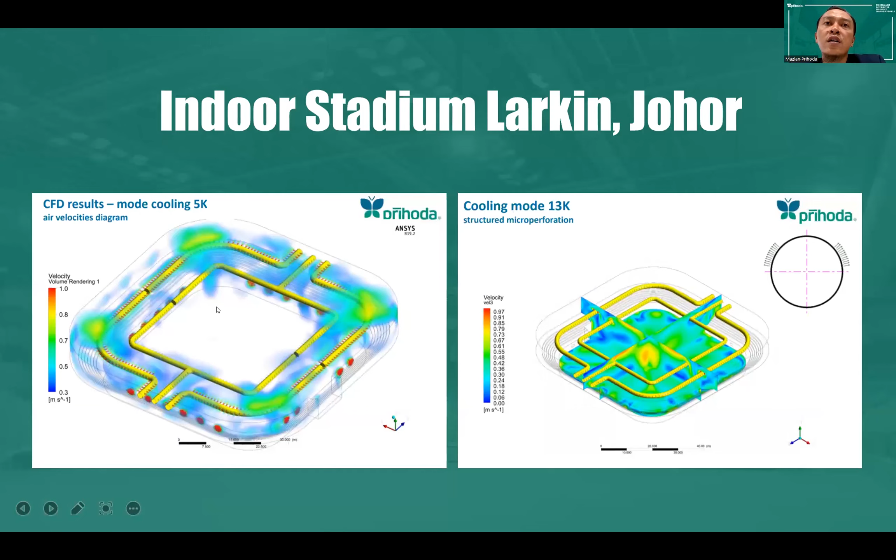The badminton standard is required at the playing court. There are I think 10 or 8 badminton courts at the center of the stadium. So they checked the velocity, and now they can play international tournaments here. All right. So this is the photo. There are 3 air handling units, 6 air handling unit branches like this. All right.

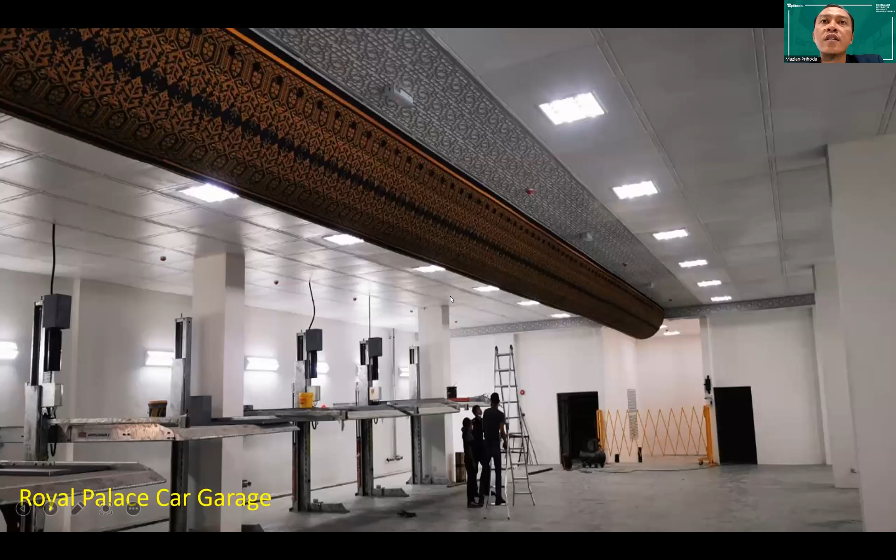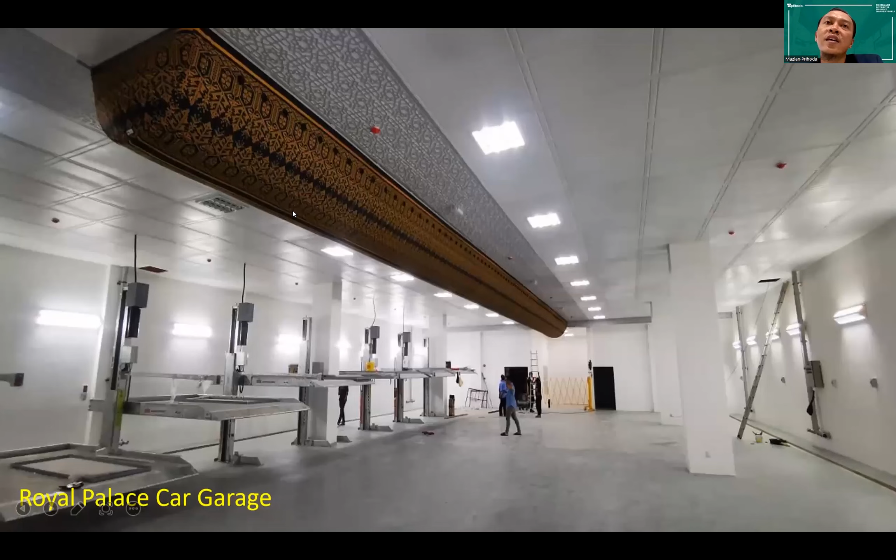All right. This is a royal palace in Terengganu. At the garage, they want to install aircon also. But what I want to show here that is interesting is the batik, a Malaysian pattern, what we call batik. Yeah, very nice. Okay, this one repeated. Okay, another interesting project, they installed it outside also, without any condensation issue, at the cafe.

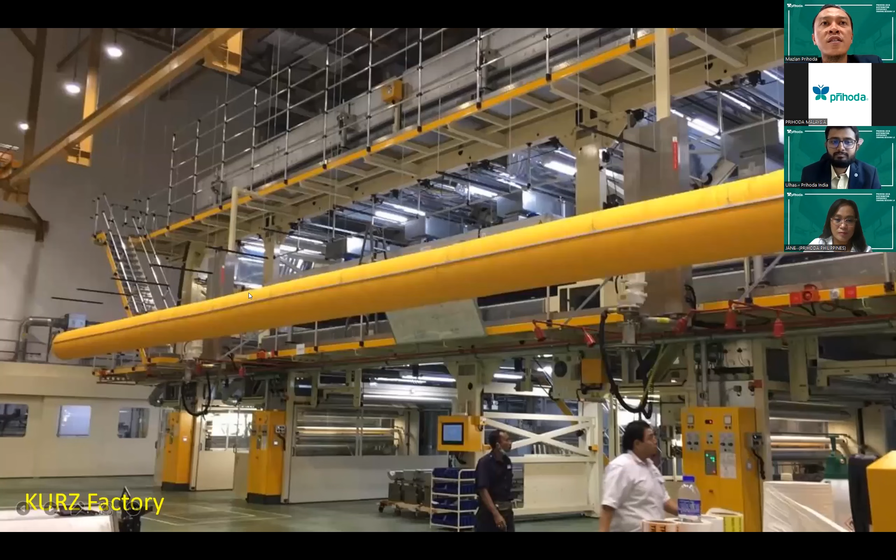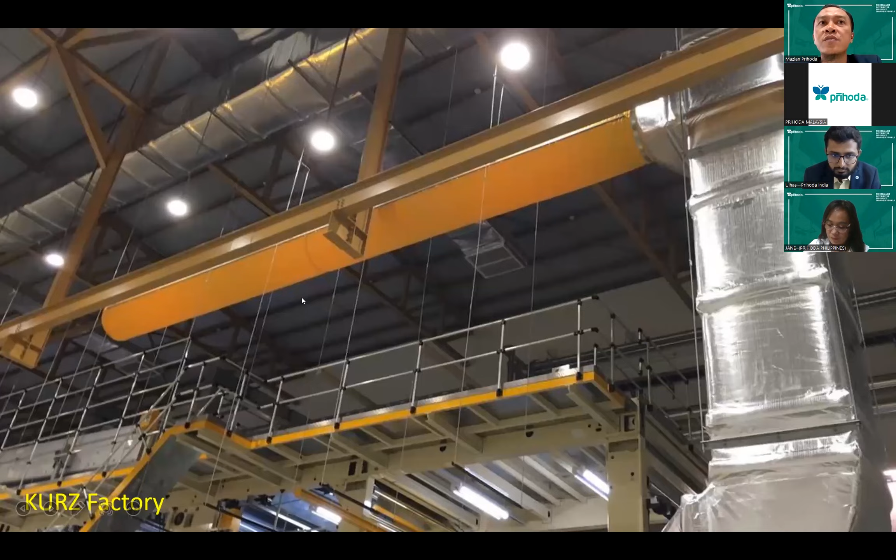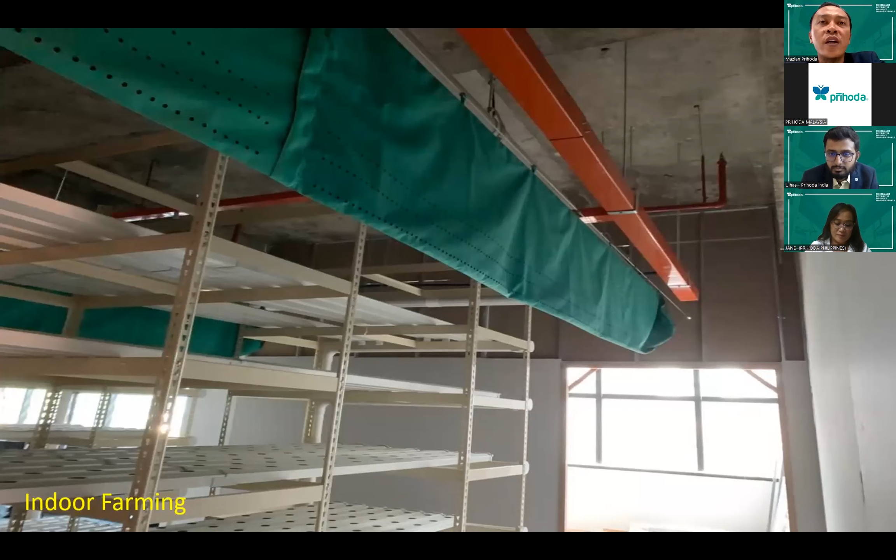Okay. So this is also interesting. This is half round mounted on the wall, without seeing that this is fabric. Okay, they have not yet completed this job. Still in progress. Clean rooms. Okay, indoor farming, just completed in the last 2 days. Yeah, this one indoor farming. Okay, that's all for me.

Okay, so any questions for you all to ask me about the Malaysian reference projects or anything else? You can open your mic or I can read here from the chat box. Wait, I scroll back. Wow, too many questions for the last presenter. Where it says can share? Oh yeah, the office already answered. Okay. Last page.

Okay, Mr. Baha from FSS Venture asked, when the duct is installed on an incline or decline, where is it better to install the aircon unit? Should the air flow go up or down? Okay, I try to answer this. The aircon cool air is heavier than hot air. So in Europe, they use what we call heating and cooling. For cooling, sometimes they put it at the top. For heating, they put it at the bottom, because cold air is heavier than hot air.